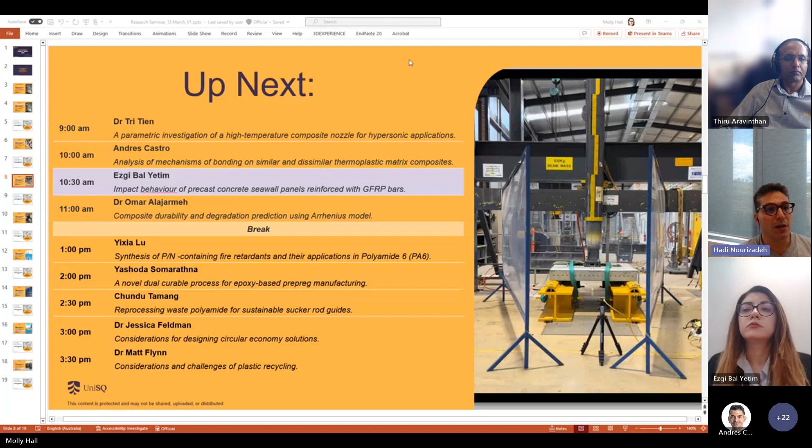So next presenter is Ezgi Bal Yetim. The title of her presentation is Impact Behavior of Precast Concrete Seawall Panels Reinforced with GFRP Bars. Ezgi, a PhD student at the Center for Future Materials, University of Southern Queensland, specializes in marine infrastructure, specifically reinforced concrete seawall with glass fiber reinforced polymer. She also completed her master's degree at UniSQ, focusing on coastal floodways during extreme events, dedicated to enhancing coastal resilience against climate change and hazards.

Her work focuses on the impact behavior of precast concrete seawalls using non-corrosive GFRP bars, addressing the need to understand the impact behavior of seawalls for varying design parameters.

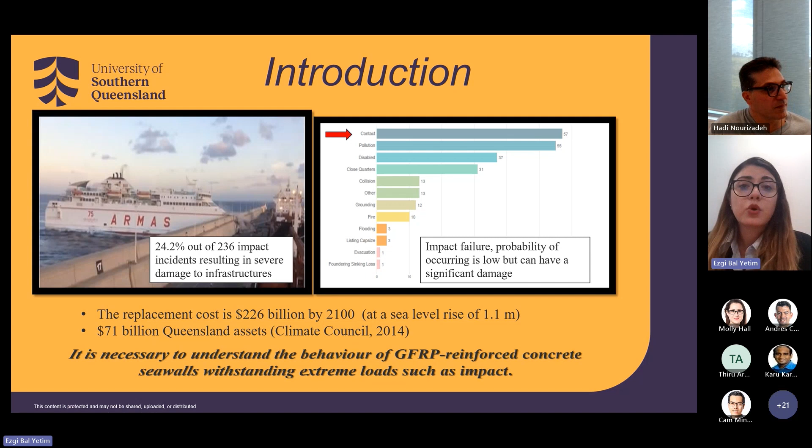Contact significance is around 57%. So based on this information, I made some research about the costs, and the replacement cost is expected to be around 226 billion by 2100 due to sea level rises of 1.1 meters. And in Queensland, assets expected to be affected by these storm events, sea level rises and flooding amount to around 71 billion.

Also, for corrosion-related problems, they are spending 15 billion every year to fix them. So that's why it's necessary to understand the behavior of concrete seawalls reinforced with GFRP instead of steel, and their behavior under extreme loading conditions such as impact.

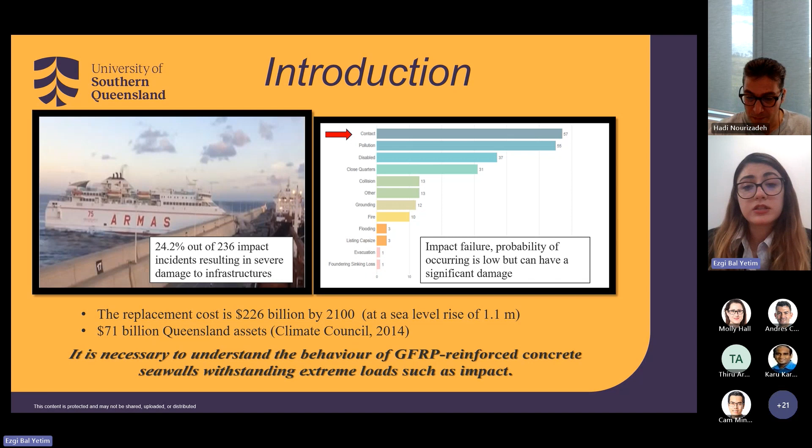So why we have chosen this project is because no one has ever studied GFRP-reinforced seawalls under impact. We have identified this gap in the knowledge as well: usually they don't have GFRP reinforcement in seawalls, and this is a new and initiative research area.

Based on that, we selected some parameters to focus on the performance under impact loading, which, as you know, is dynamic loading and requires a dynamic analysis, due to the lack of design guidelines as well. We selected design parameters to analyze the impact behavior of concrete seawalls which are still unknown, such as drop height and reinforcement configurations, like bar spacing and bar diameter.

Drop height is one of the most important ones because it's about the impact energy, and impact energy relates to the resistance of the structure, which gives us information about the structure's toughness. After these studies, I will focus on a numerical and parametric study with different parameters after the verification. But in this particular presentation, I will just talk about the drop height.

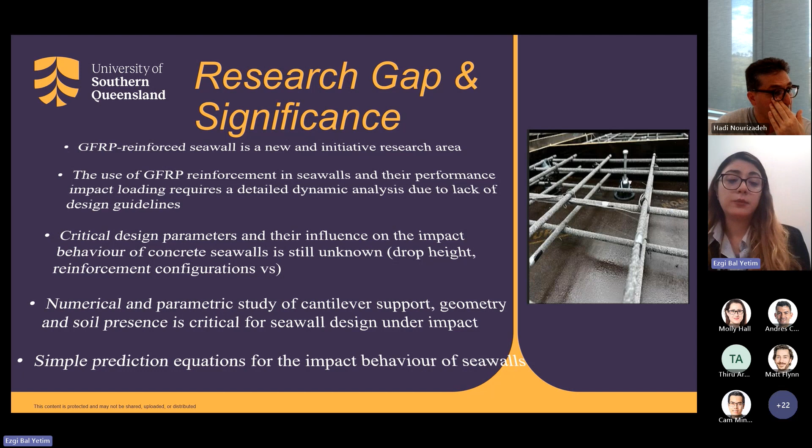That's my first objective. And then I will see the chance to create some prediction equations for the impact behavior of seawalls. The main objective is the behavior under impact, but the first objective is the drop height and strength evaluation. After that, I will study the effect of compressive strength, bar spacing, bar diameter, and mesh location after the verification with numerical or analytical studies.

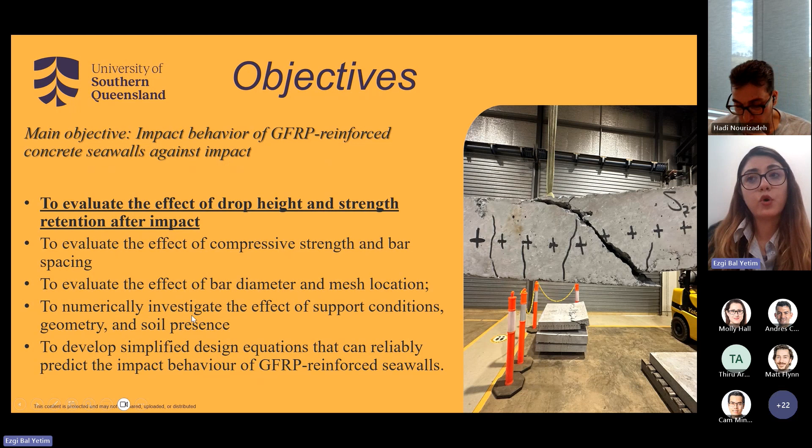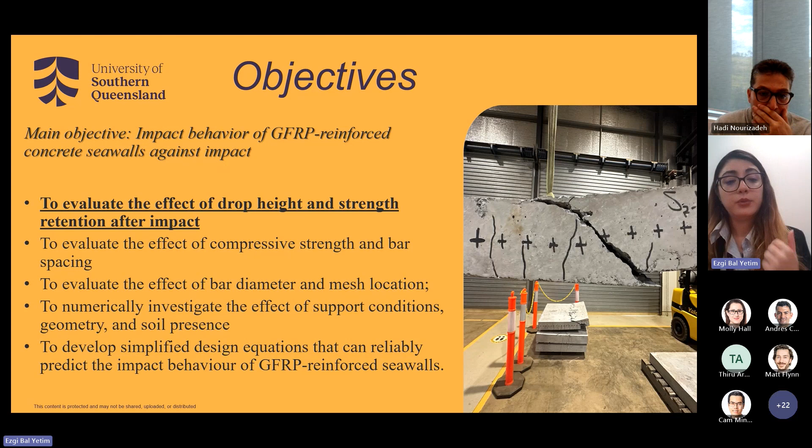Also, during this first paper part, I will be doing some numerical investigation of the support conditions and geometry, because they can be in different geometries. As I said, there are some curved seawalls as well, not just vertical seawalls. That's the next step. And we will see a chance to develop simplified design equations that can predict the impact behavior of GFRP-reinforced seawalls.

When I looked at the literature, I saw that there are several factors affecting them. That's why I selected the parameters I just mentioned, such as drop height, concrete strength, reinforcement layout, bar diameter and spacing. There are several other factors. Seawalls are in a marine environment, and their support conditions are cantilever type. That can change their behavior, and the soil presence can affect it as well. These are things I will be doing later.

In general, looking at the mechanisms and failure modes under impact, there are usually two types of failure. The first one is local failure, and the second one is overall global failure. Local failure is usually about the transmission of stress waves. The overall response can be a combination of local and flexural failure at the bottom of the panels. This behavior is usually expected for this type of seawall under impact loading.

In this research, I am focusing on low velocity impact, which is below 10 meters per second, but high velocity impact can be done in other research. I've seen people doing missile-type impact, but we are just focusing on low velocity impact in this research. The failure behavior can change, as I said, due to overall or local failure. What we expect is maybe some spalling or scabbing.

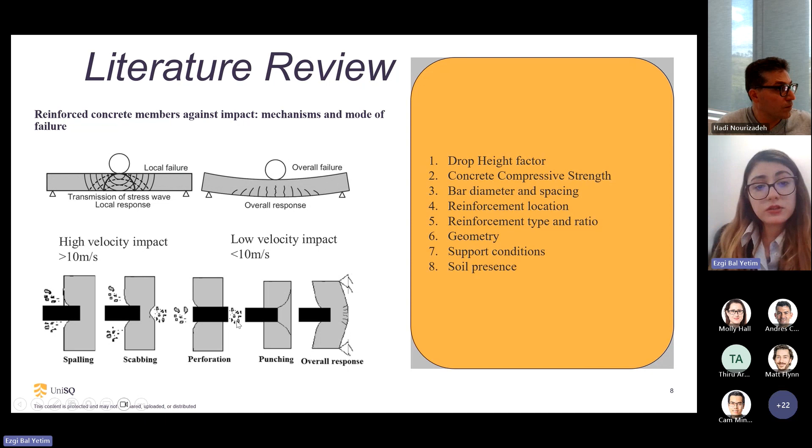It could be like perforation in the structure, or punching type of failure, or overall type of response. I would like to give you a general information about my methodology. So what I'm expecting from my drop height study is like a mode of failure analysis, impact force, acceleration and velocity, and maximum displacement and strain. There will be also some analysis part that has to be predicted and calculated. That's about energy absorption and dissipation and strength retention.

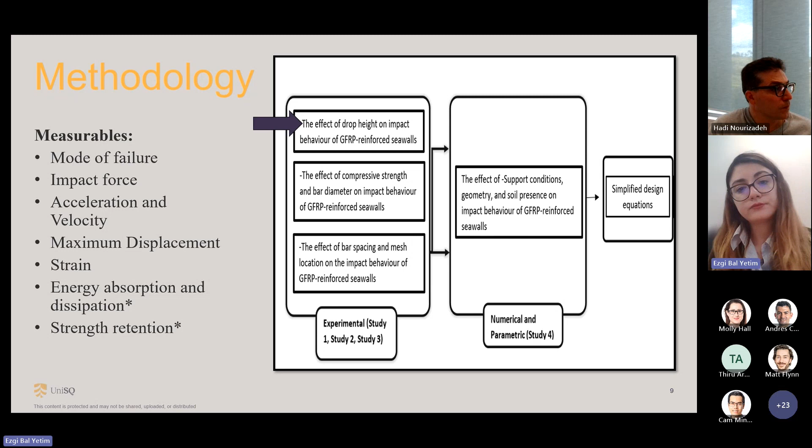When it comes to our design, our seawall design, as you can see on the left-hand side, it's just a simple one-way slab that we have planned as the first step of this project. So the size of these panels is 1,000 by 1,000 millimeters, and the thickness is 125 millimeters.

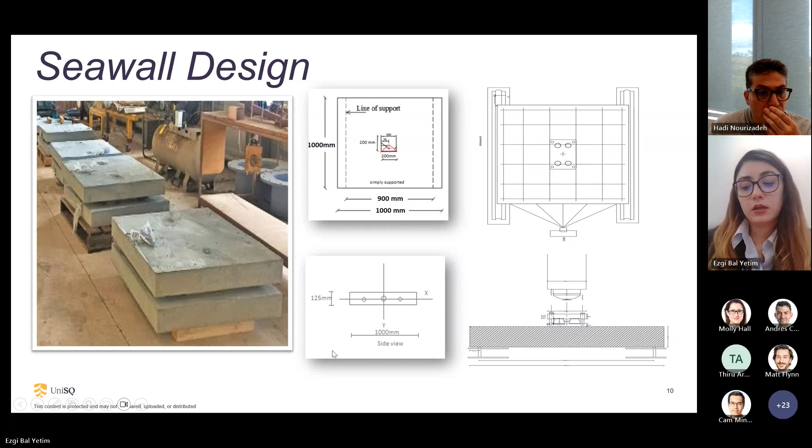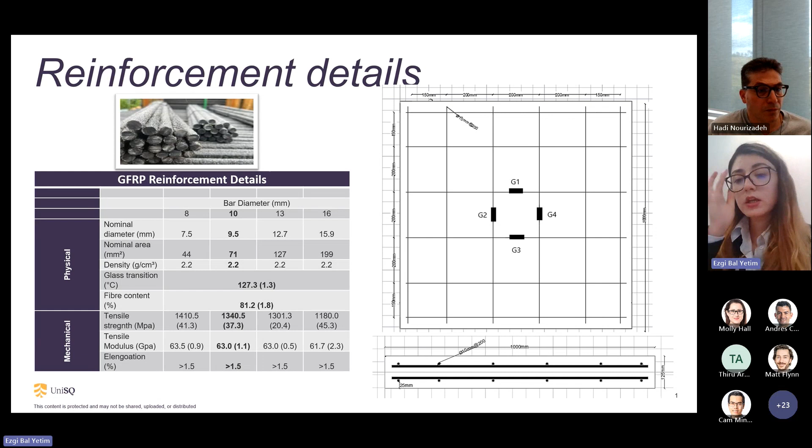So when it comes to reinforcement details, we are using GFRP reinforcement in these panels, as you can see on the right-hand side. So the bar diameter I'm using in this study is 10 millimeters, and the nominal area is 71, and you can see also other mechanical and physical properties here. We reinforce these plates doubly reinforced, so there is not just single reinforcement. There is one at the top and one at the bottom, and we have 25 millimeters concrete cover. And we also placed some strain gauges in the reinforcement to measure the strain of the GFRP bars.

The effect of drop height, as you can see, this is my test setup, and we have different drop heights from 1 to 2 meters to change the impact energy and the impact velocity. So we are testing them under impact from 1 to 2 meters, and we also do a reference sample under flexural loading to analyze the strength retention after impact, because we have done the flexural loading after these drop heights, which is a complex process that no one has actually conducted in the literature. After impact, what is the strength retention of these panels? So that's also the second part of this study that we've done.

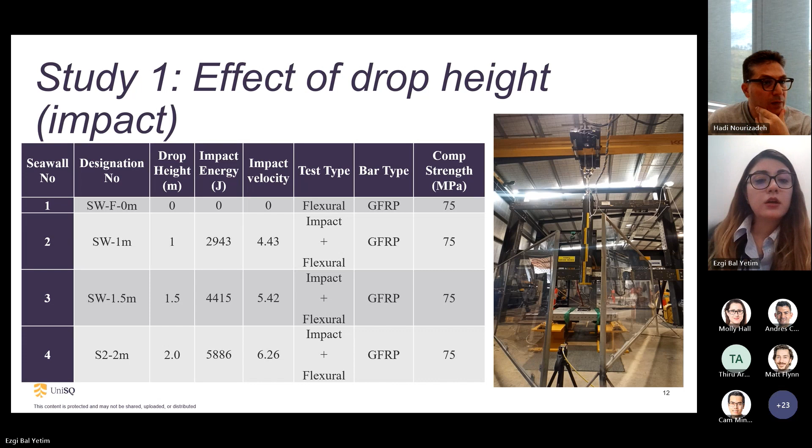The test setup, as you can see, the impact is on the left-hand side. You can see this drop hammer is around 300 kilograms, and we have some equipment to measure the strain, the DIC for the deflection, and a data logger for the force recordings. So we are using a plate here, which you can see on the right corner. That is our force assembly to distribute the force evenly and also protect the force sensors from the very high impact that 300 kilograms is causing on this structure.

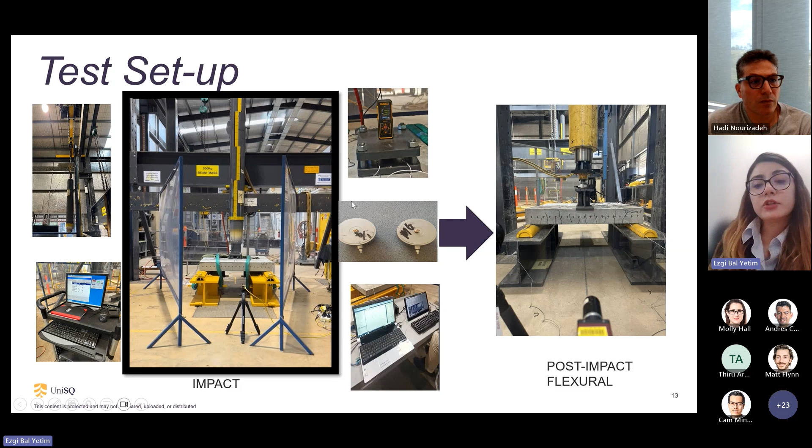And I would like to mention how we actually measure the drop height. We have a special equipment here to measure the drop height between the panel and the hammer tip. So after this, we have done some post-impact flexural testing, which I will be talking about later.

So the preliminary results and discussion part, I would like to first start with the impact. The effect of drop height on the failure behavior: as you can see, from 1 to 2 meters, we have some global flexural cracks at the bottom. And we have some diagonal cracks next to the corners, and transverse cracks concentrating usually in the middle, due to the impact being at the center of the panel.

What I observed from here is up to 1.5 meters, there was no local type of failure at the top surface. But after that, at 2 meters, we have a local crack here showing a local type of failure. This can also be observed at the bottom of the seawall. Here's another big hole at the bottom. So the failure mode and crack pattern and propagation is different for different drop heights.

So I would like to also mention my results here. As you can see, from 1 to 2 meters, I calculated the impact energy, the total force we recorded from our force sensors, the impact velocity, the deflection results, and the GFRP strain. The deflection results, I will talk about them in the next slide, why there is variation or not a linear trend in the deflection and force.

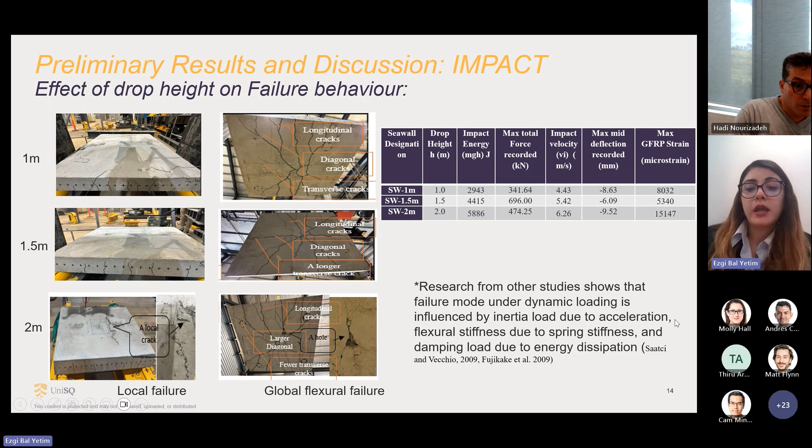I've seen that in the literature, the research shows that failure mode under dynamic loading is very different than static loading, and that can be influenced by inertial loads due to the acceleration, flexural stiffness due to the spring stiffness, and damping load due to the energy dissipation.

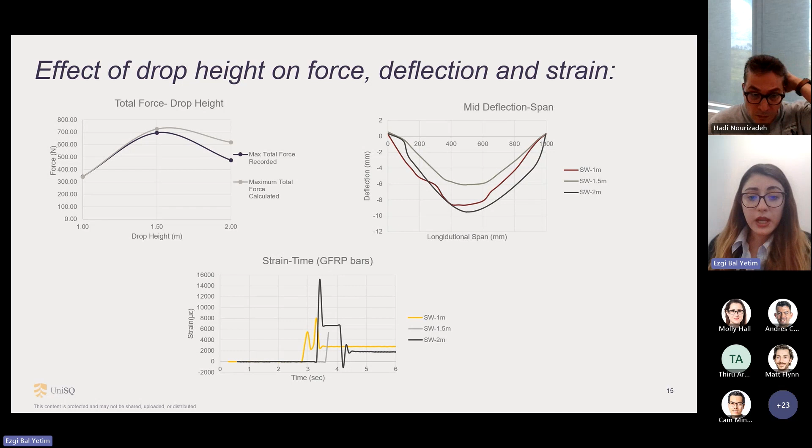So these are my results for force, deflection, and strain. As you can see, the force did increase up to 1.5 meter and then dropped after 1.5 meter at 2 meter drop height. My deflection results were also surprisingly less at 1.5 meter. After analyzing this, I see there is a relationship with the stiffness of this panel at 1.5 meter that showed a different trend than other drop heights. So I will talk about my understanding from this preliminary discussion of these results.

The failure mode changed with varying impact energy via drop height. The failure mode was only governed by global failure up to 1.5 meter due to flexural cracks at the bottom, and no local damage was observed due to perforation, spalling, scabbing, crushing, or cracking. At 2 meter drop height, we can see an additional local concrete crushing failure near the impact point at the top surface of the seawall panel, which changed the failure mode from only global flexural to local crushing failure.

Crack propagation increased generally from 1 to 2 meter, though there were differences in the pattern. Deflections increased from 1 meter up to 2 meter, but dropped at 1.5 meter. The structural behavior and failure mode of this panel is actually influenced by the flexural stiffness of the structure and some damping and inertia force of the structure.

Maximum force increased in general from 1 to 2 meter, however it didn't follow a linear trend. The total force recorded reached a peak at 1.5 meter due to the increased impact resistance and stiffness of the seawall panel, showing less deflection, but then it decreased at 2 meter drop height. The highest GFRP strain was recorded at 2 meter drop height due to GFRP rupture.

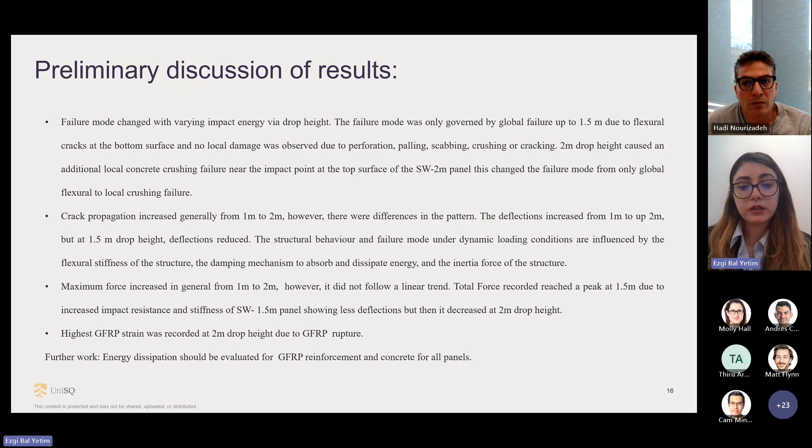I have to further analyze energy dissipation to understand why this trend happened in the force and deflection, to evaluate this GFRP reinforcement and concrete behavior in terms of energy.

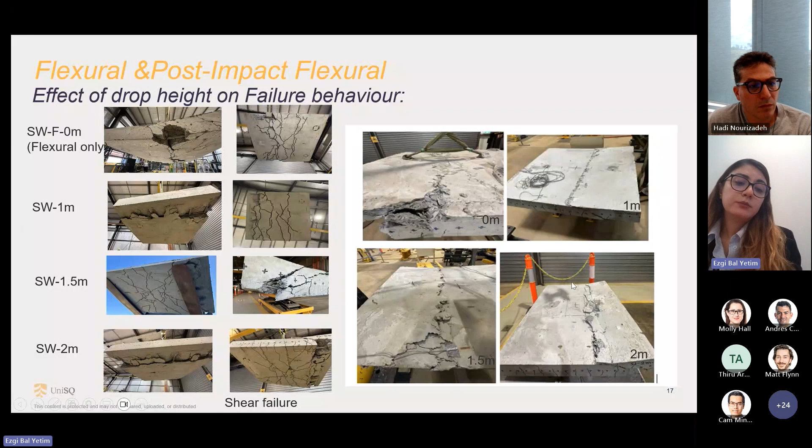I would like to also give you a little bit more information about post-impact flexural behavior. As you can see, for my flexural testing, up to 2 meter, we tested these samples already under flexural loading as well. In general, the failure mode was shear failure. So I will just give you a little overview of my results for bending load, deflection, strain, and strength retention. Sorry if I'm rushing a little bit, I'm trying to finish on time.

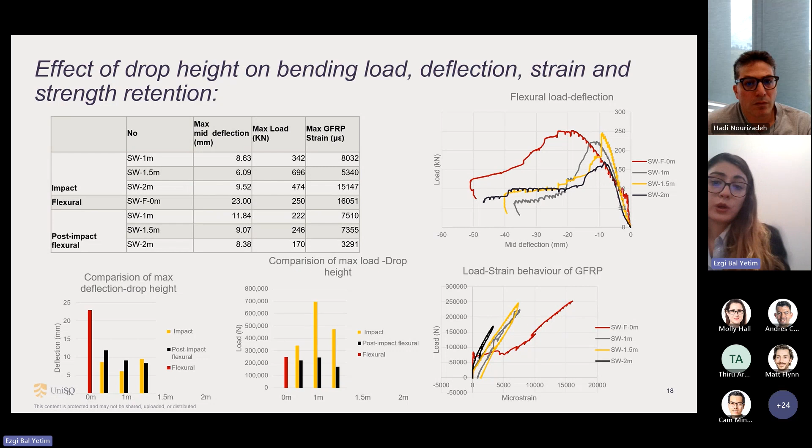So the impact flexural, post-impact flexural results can be seen here. Usually the trend of this flexural load deflection, comparison of maximum deflection and drop height, and also drop height with maximum load strain behavior, I'll talk about in the next slide. What I observed is that the failure pattern showed the main failure mode was shear failure under flexural loading, compared to flexural failure under impact loading.

The highest flexural deflection was observed at no impact, but compared to this reference panel, post-impact flexural deflection is reduced from 1 to 2 meter. This means impact loading has already caused some deformation in the panels up to a certain level during impact testing, and 2 meter impact drop height had caused the highest damage. So when comparing to flexural deformation of the reference panel, the highest reduction in flexural deflections was observed at 2 meter, and post-impact flexural strength in general reduced from 1 to 2 meter.

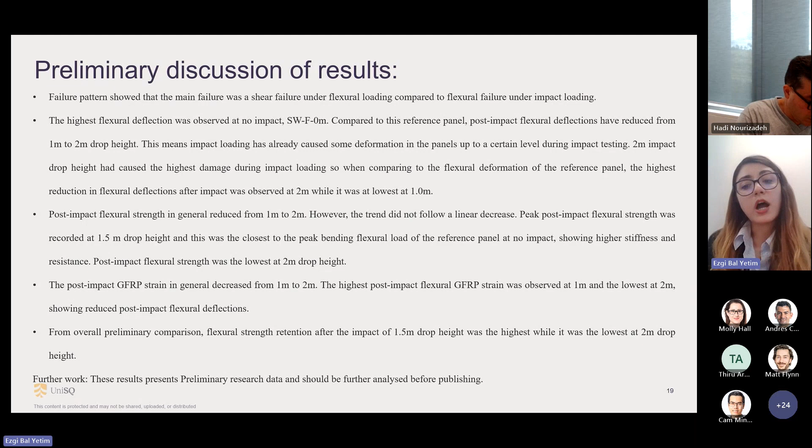However, the trend didn't follow a linear decrease. Peak post-impact flexural strength was recorded at 1.5 meter drop height, and this was closest to the peak bending flexural load of the reference panel at no impact. This means it showed higher stiffness and higher resistance, and post-impact flexural strength then decreased at 2 meter drop height.

In terms of GFRP strain, this in general also matches with my deflection results, decreasing from 1 to 2 meter. The highest post-impact flexural strain was observed at 1 meter and the lowest at 2 meter, showing reduced post-impact flexural deflections.

So from our comparison, we can say that flexural strength retention after the impact at 1.5 meter drop height was the highest, while it was the lowest at 2 meter drop height, due to, as I explained, the higher stiffness and resistance of this panel specifically.

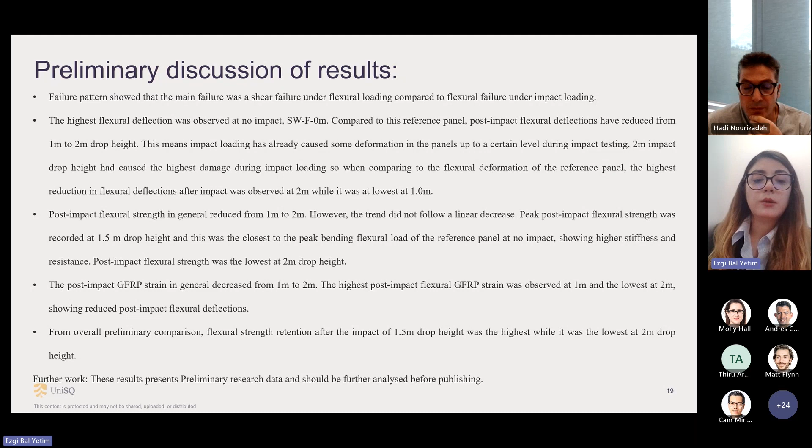So for further work, these results present preliminary research data and should be further analyzed before publishing.